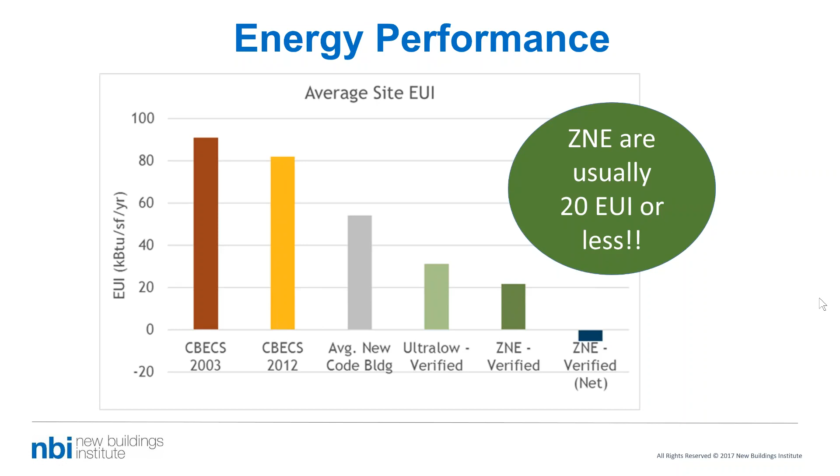We have verified and emerging buildings throughout the climate zones in North America. For those of you on the phone, one interesting feature is the ability to pull buildings in your region from the NBI database, look for comparables, use them as examples with clients, and demonstrate the practices of other buildings in your area.

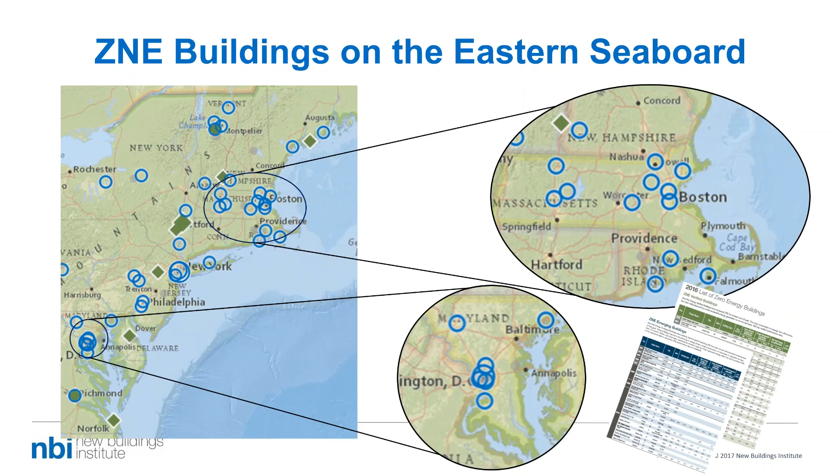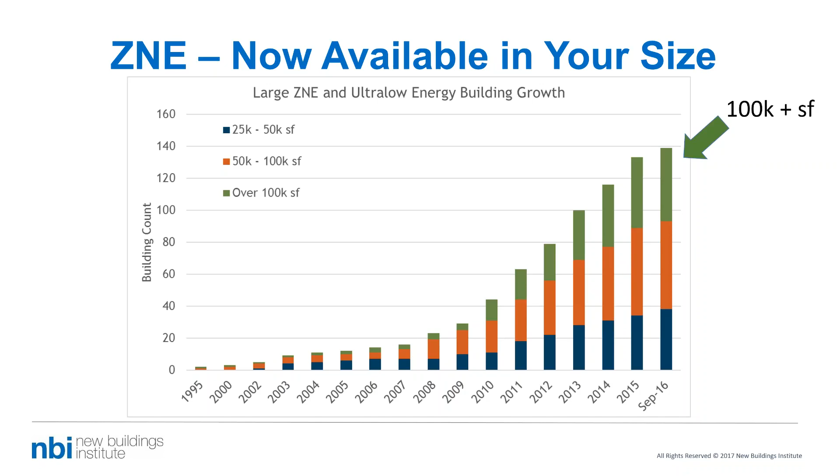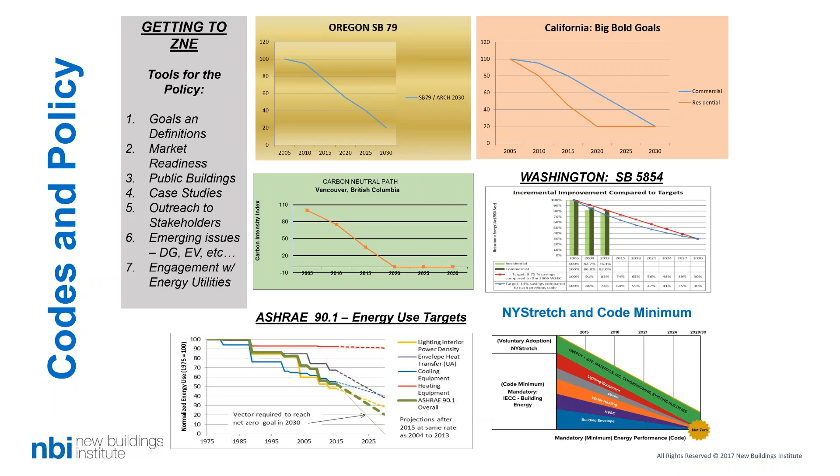Again, we want you to share your projects with us. It's a very simple online form—let us know about something. If you go in and see the report and a building you know about isn't listed, let us know, please.

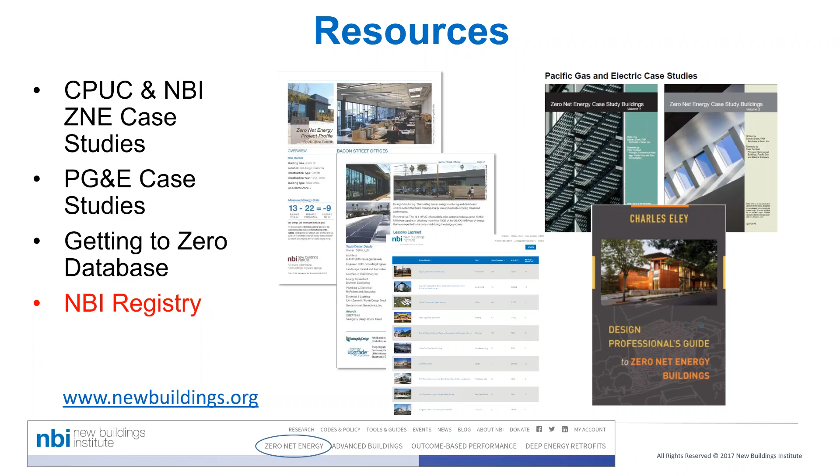You can get information on state specifics, particularly in California—we're tracking the state of California activity. We offer workshops throughout the country for early adopters, especially to public entities, municipalities, and school districts. This is definitely the go-to e-document you can sign up for if you're interested in seeing what's going on; we track this and put it out quarterly.

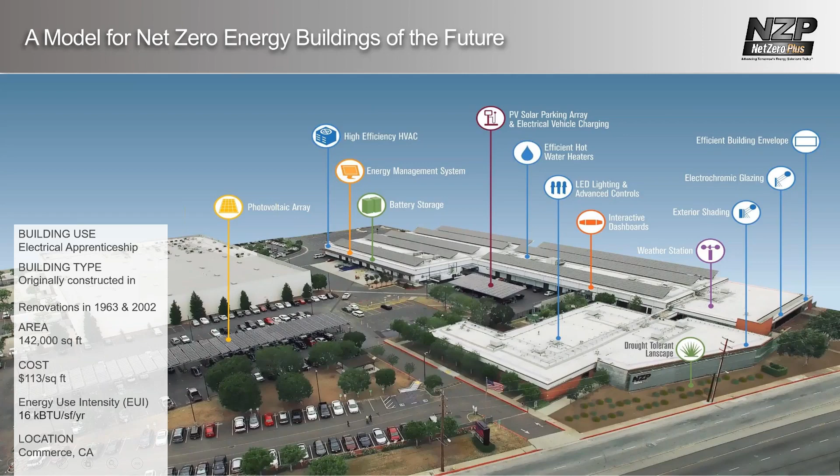Before we started the project, we did a very intense energy and building audit. We used Stok, a company located in Northern California, as a consultant on the project. Part of this was we went through the entire building envelope. The bottom part of this slide, you can see on the right side my shade structure, and on the left side, a large group of windows where we've installed electrochromic glass for shading on this long hallway of the school. When the sun hits it, it's got sensors on the outside of the building, and it will automatically shade and drop the temperature on the inside.

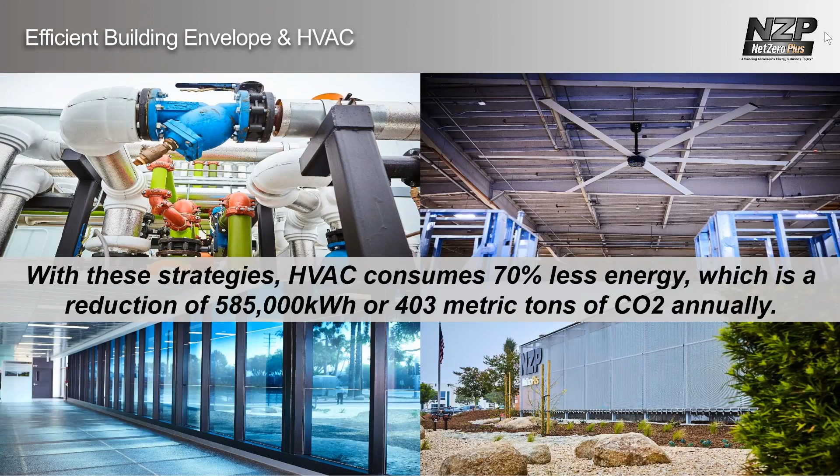For the space, we've used fans, exhaust fans, to help make the temperature comfortable.

Our next slide, we'll talk about our plug load and the hot water. We've reduced the energy used for hot water by about 93%. We've extensively looked at our plug load. Interestingly, by using solid lighting control and HVAC control, our new problem load, if you will, is in fact my plug load. My plug load is the biggest load on site. We're looking in the classrooms at deploying LED projectors and micro computers to help drop that plug load as well.

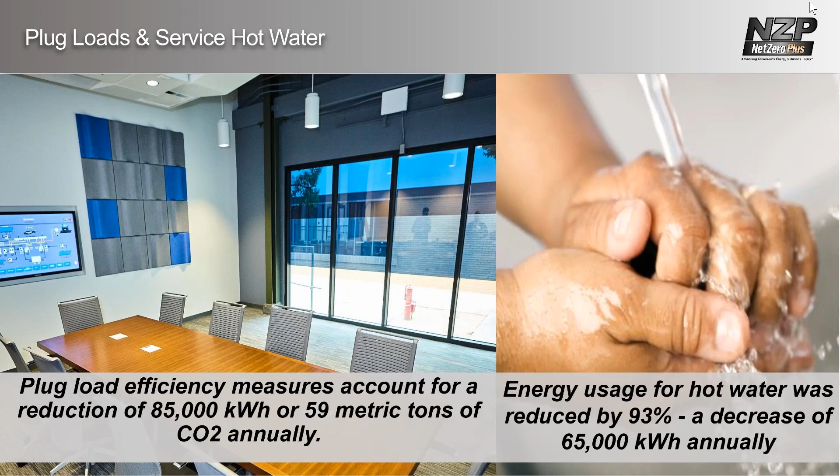Through the use of new LED lights and advanced lighting controls, we dropped that lighting load. That lighting load is now lower than my plug load. With LED lights, we found that brand new LEDs can be tuned down, so we've tuned all of the new lights inside of the building down to 80%. So when we've got 100% lighting going on, it's in fact only 80% of those LED lights, and we can continue to tune those down as needed.

For a number of reasons, because we're a school and certainly in the public eye, we have extensive use of dashboards. What you're looking at are 4 of the 9 dashboards that are here on site. These are touch sensitive, soon to be available on the school's website. What they do is allow interaction between my students, my instructors, people touring, people from the industry, architects, engineers, contractors, public officials, to really get a feel for what the building is doing, what the systems are doing today, and what they've done historically over a time period.

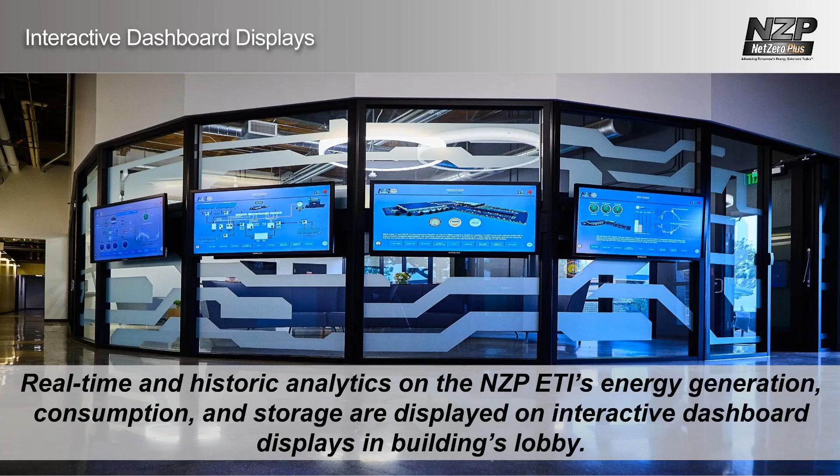We are overproducing, and that's where we get the name Net Zero Plus. That plus, the overproduction, is stored in the form of utility grade lithium-ion battery. In the event of an outage that takes us overnight, we can discharge those batteries and use this as an emergency operations center, as well as during the daytime island the building, disconnecting from the grid to continue to operate.

What we're in now is a graphical layout of our microgrid. Again, it shows the components that are integral to my microgrid.

I will add that we've got the ability with the microgrid to participate in the utility's automatic demand response. We've got the ability to also use the stored energy or the system itself to do peak shaving at times as well. We also have electric vehicle chargers.

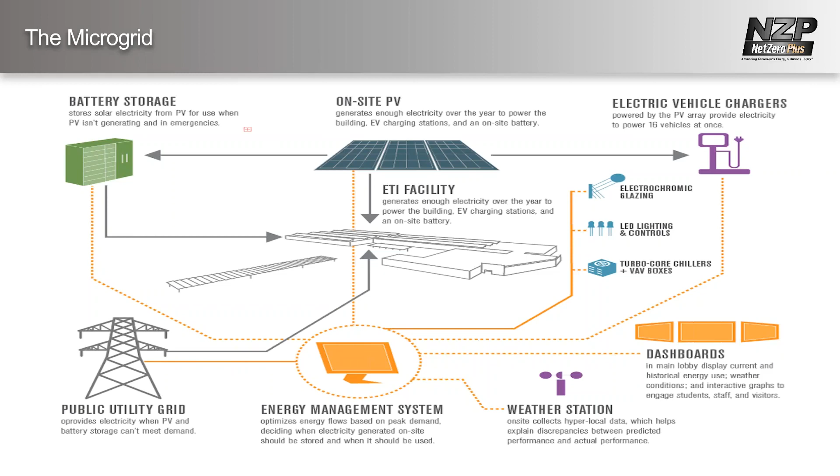Again, for more information, we were featured in a PBS documentary. The title of that documentary is Building Below Zero. It's still available for streaming to view on the PBS website.

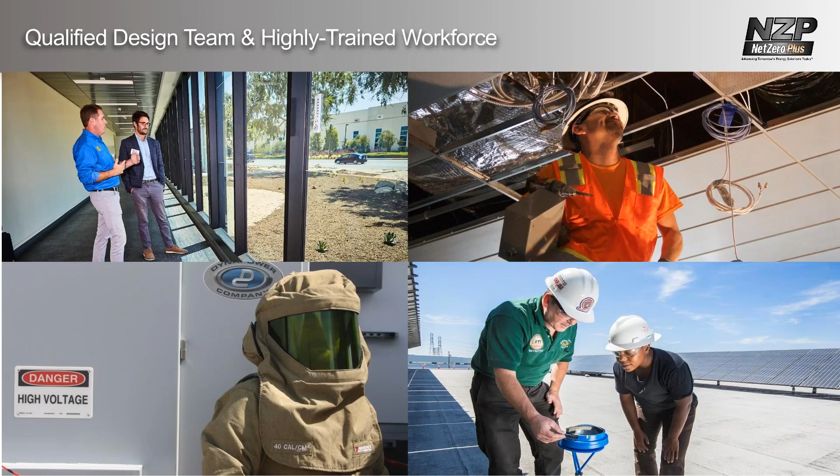It's critical when you start a project like this that you make sure that you team yourself with a highly qualified and trained workforce.

We are affiliated with the Electrical Training Alliance, the IBEW, that's the Electrical Workers Union, and the National Electrical Contractors Association.

Unfortunately, for our friends north of the border, we don't show anything in Canada, but we cover both the United States and Canada. There is training that is being completed now that will make sure that electrical workers and contractors in the U.S. and Canada are trained to do these projects.

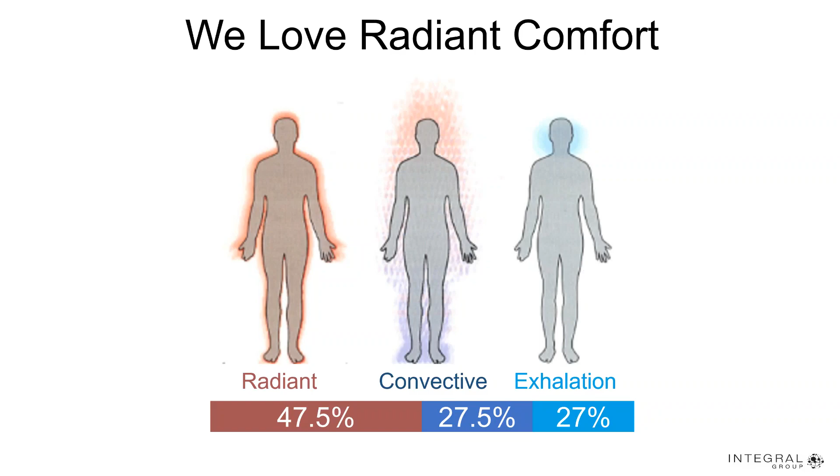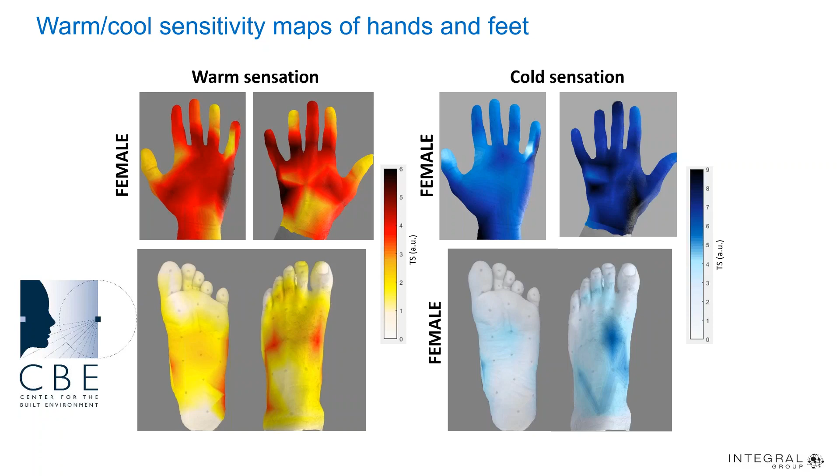The Center for the Built Environment at Berkeley is a group doing a lot of research, currently digging into radiant cooling and heating comfort systems in a 3-year study, mapping the body to understand where on different parts of our body we feel comfort sensations. Work we've done has found that radiant HVAC systems are often very comfortable, very low energy, and could be much smaller than conventional systems.

In one paper from Denmark, researchers found that radiant systems are able to keep people comfortable even when running at 50% of their designed capacity. This means buildings could operate at lower peak demands and even ride through peak heat waves without critically impacting comfort, allowing them to be very low energy and have very low demand.

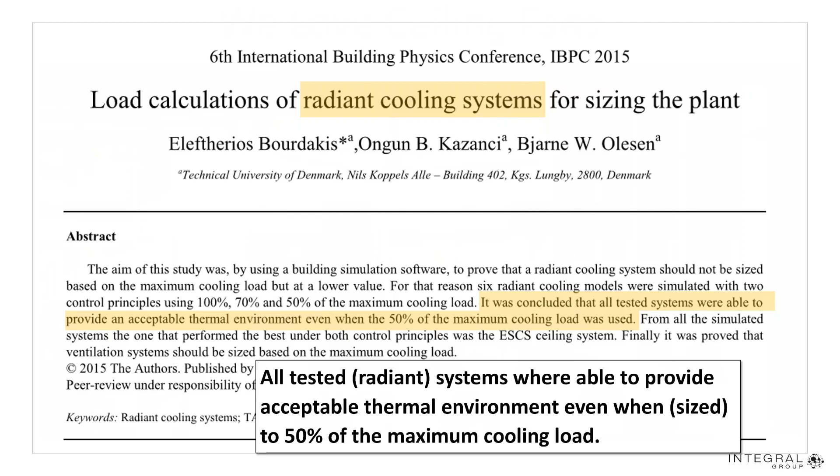A second key strategy I want to share today is designing with ceiling fans. We love ceiling fans - not just the small ones people bring to their desks from Target, but elegant ceiling fans. Architects and engineers need to design intentionally with these fans as key systems that provide comfort in classrooms and office buildings.

Much like radiant systems, there's very little research on the true effectiveness of one fan versus another. Right now there's a research project at Berkeley developing test procedures and design guides to help designers understand which fans provide better comfort at different configurations. Even a small fan running at 2 to 30 watts can help mix air temperature and provide adaptive comfort at higher elevated temperatures. Initial research done 5-6 years ago by Gwelen Paliaga shows how you can design different comfort criteria using fans throughout a building.

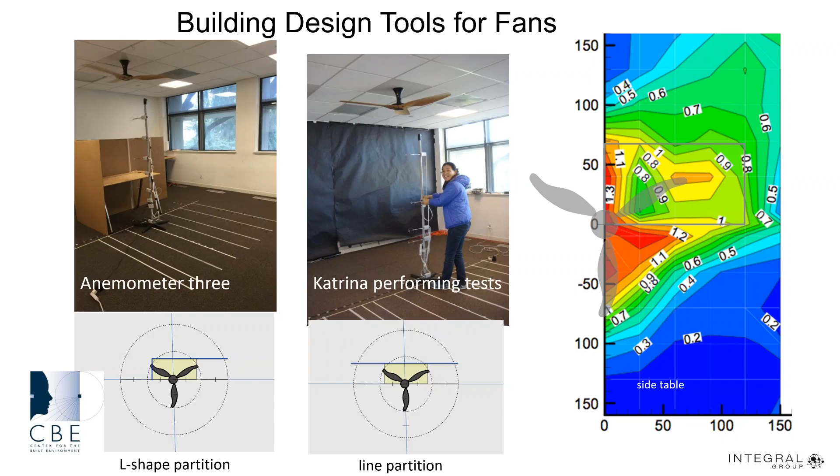When we combine these strategies, we start to see very low energy results. A radiant building with good air movement can almost multiply these benefits, improving both the capacity of the system - greatly increasing how much cooling or heating you get - while also mixing and providing fresh or recirculating air across people's bodies and balancing their comfort.

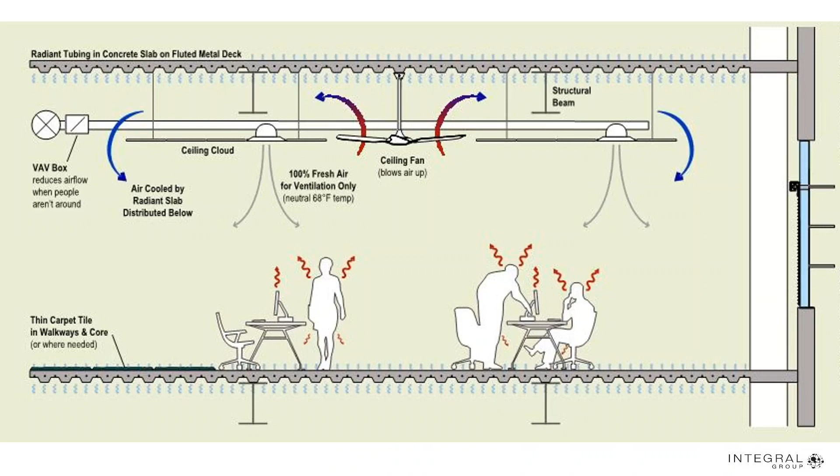For future-ready buildings, some research shows that even when we block a ceiling with acoustical panels to manage noise levels, adding a small fan in the right location can not only balance out the cooling that ceiling provides, but increase the cooling capacity even further - mixing air and providing the cooling needed to manage peak load while keeping systems simple and low energy to operate.

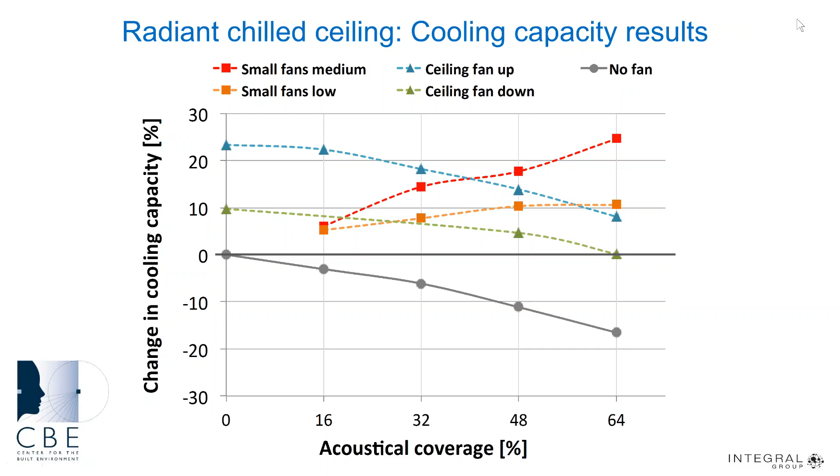So... for future ready buildings, let's see here. I'm going to pause for a second while I flip through my slides. Some ideas that I'll leave you all with here.

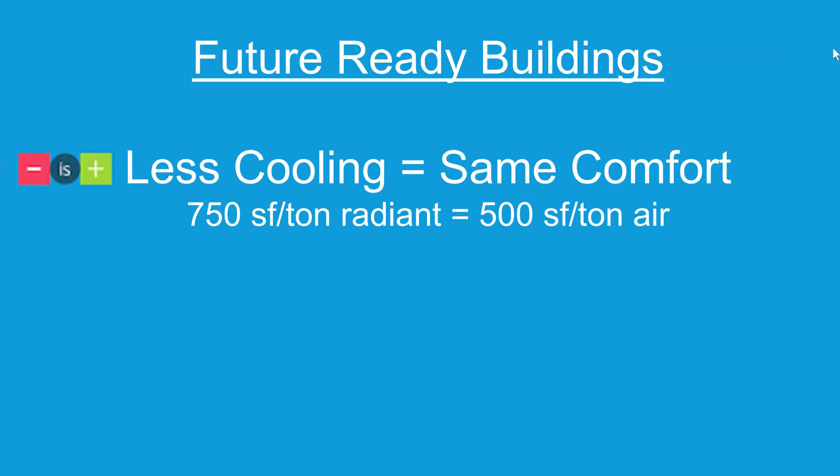For future ready buildings, remember: less cooling can mean the same comfort. Good design doesn't have to depend on how much cooling is installed in the building. Ceiling fans for all - how much can they really cost when you look at the great quality of space they provide in all applications? Both these strategies combined become best friends forever with systems like battery backups and simple solar systems in buildings that can ride through peak heat waves in critical times.

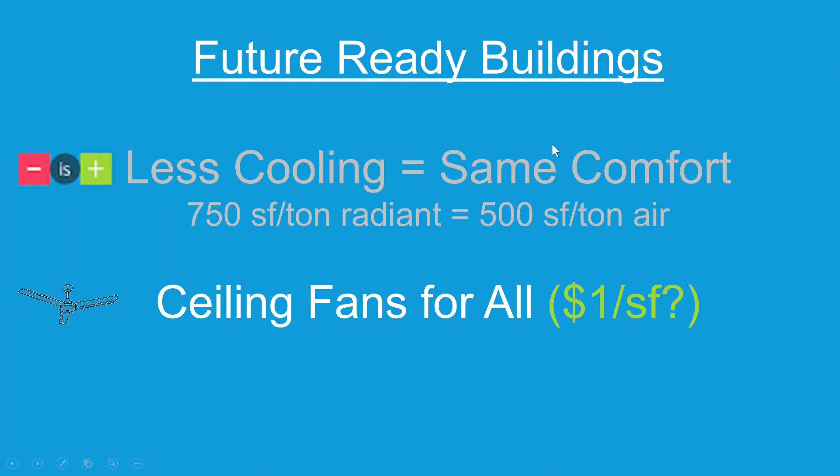Keep a lookout, question the right criteria for your buildings, and bring some of the leading research into your projects to share these great ideas that are only now starting to emerge from different universities around the world.

And thank you, Neil, that was fantastic. Yeah, great. I'm going to pause because we have 4 speakers, and see if Stacy has any questions that people have put in, just a couple for the first part of the webinar. Stacy, do you have anything you can share? Any questions our speakers can address? Yeah, can you hear me okay? Yes, excellent.

There are a couple questions, some around the definitions Kathy raised early in this presentation, so I'm taking you back a bit. There were questions about: if a building has 100% renewables, but it's all off-site renewable energy, how is that categorized? For the definition NBI is using, which is generally compatible across the country, off-site renewables are not counted towards zero net energy building status.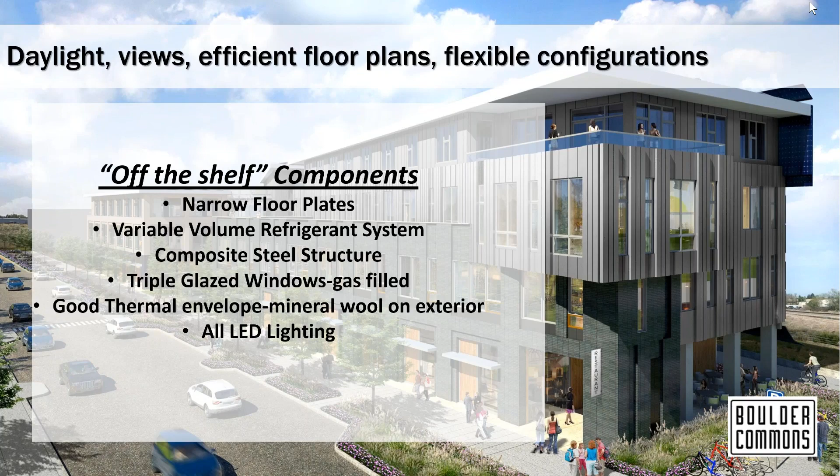So next slide. The spaces are designed in an interesting configuration because we wanted narrow floor plans, 65 feet wide on average, but we also wanted larger floor plans without too much area eaten up by the core, shown in gray here. We actually created a modified H-shaped form, and that H-shaped form has 10 sides, all of which have glazing on them, allowing for a wonderfully daylit floor without the core eating up too much of it.

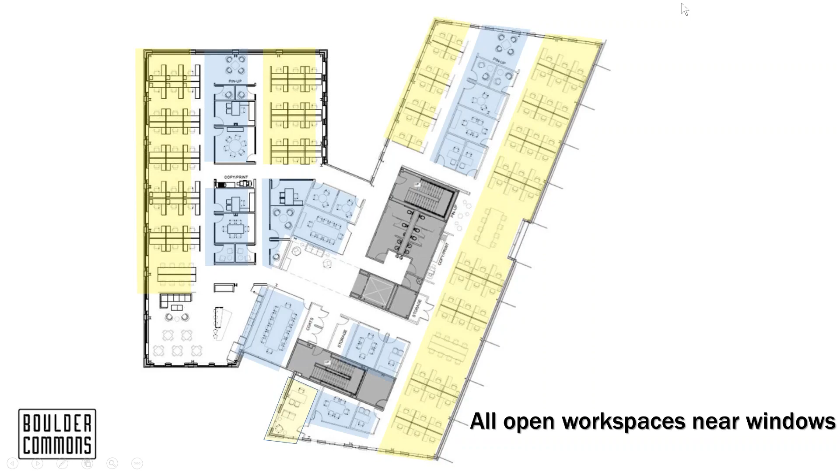Next slide. From a solar production standpoint, we're using the roof of the building, with the exception of a few portions of a roof deck, and then we're doing the whole southeast wall as a solar wall. As we modeled the project with Integral, we realized we were getting approximately 70% as much energy on that southeast wall as on the roof. So we decided to create a solar rain screen and essentially use solar panels as siding.

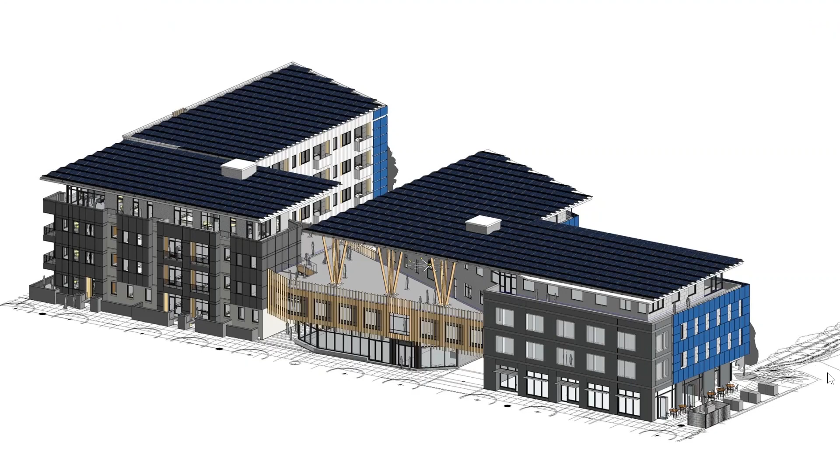I think the only way we've been able to do what we've done in a market rate building, competing with other buildings in town on price, was to bring in a pretty educated team from the very beginning. EHDD had lots of experience in net zero buildings, Integral has experience across the country, Coburn brought great local experience, and Huntsman Architectural Group, who helped with the interiors, has been involved in a number of highly sustainable interiors focused on employee comfort. Without that team, we would have been stumbling around trying to get to net zero. With the team we have, we're hopeful we'll be certified by NBI after our first full year of operations.

So thank you. Thank you, Andy.

Fantastic example of market rate, and also that interesting aspect of vertical use of photovoltaics. I'm going to introduce Kenner Kingston, President of Architectural Nexus. Kenner, you have control, and we'll see how that goes.

Great. Thank you. Can you hear me okay?

Excellent, fantastic. Well, the conversations today really do point toward this discussion about a part of sustainability, regenerative design, ZNE design that is harder to control than the building, the engineering, or the systems, and that is the people inside. Just a little bit more about me: I have the privilege of leading a group of diverse design professionals in an integrated practice that includes site design, interior design, graphic design, branding, as well as architectural design. We like to think of ourselves as a large firm with a small firm culture, and in that regard, we're very people-oriented, people-driven. That sets up the discussion about why an architect is so interested in talking about the people inside the building, not just about the building.

And so we found a partner. We're in the second stage of the evolution of our occupant engagement behavioral energy programs at this point. We've partnered with a technology group, Sustain3, that has developed a web-based platform that helps us drive change at the individual occupant level through gamification. Gamification is something I've been watching for more years than we've been a building owner, trying to figure out how you work this into running a business or providing services to folks interested in ZNE buildings. Well, we're now in our third year of the program, dubbed YouMatter at the University of Utah.

The program is the behavioral component of the university's Better Buildings Challenge effort, trying to help them support their long-term carbon reduction goals. All of the low-hanging, easy stuff they already know to do, all the engineering solutions, all the architecture solutions, those are backed up into a big pile called deferred maintenance that's measured in millions and millions of dollars. So being able to approach them with solutions to driving down energy usage without having to tap capital budgets is kind of a key issue.

We've had tremendous success with huge rates of engagement in the College of Science, and a 25% plug load reduction result in the art and architecture program. Next slide, please.

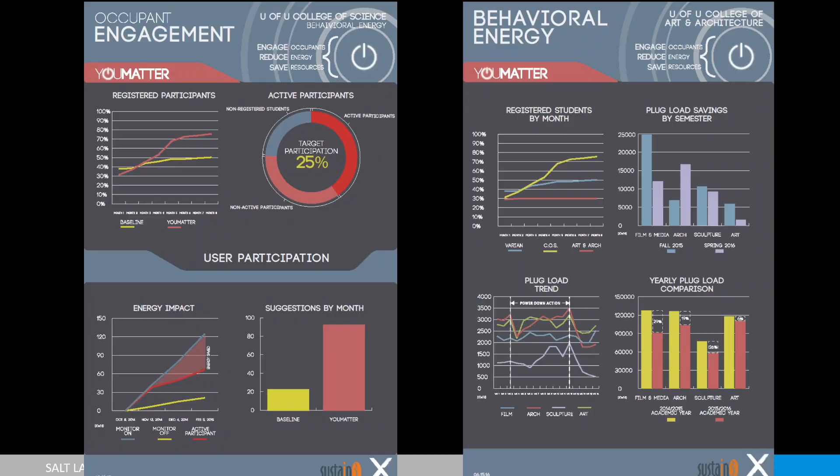So how do we do it? Process is the key here. The Sustain3 platform works by understanding that individual occupants have a limited bandwidth. Their time is precious, and they're all motivated by very different things. For some folks it's going to be peer pressure. For some it's rewards. For others, competition. For others, information and learning. And so you have to figure out how you can access that.

And I think this platform has done that. What is common to all of the motivations that get people to change their behavior in a building is that the change doesn't occur unless someone does something. So the key to the platform is that there's a call to action in the program on a weekly basis that tries to move passive occupants into active inhabitants by getting them to do something different. And what happens is if you get enough people doing something different in a common platform, you start to see a culture emerge. It's extremely successful in places where a culture already exists, such as in our office.

We employ the program here in our office because we've taken this LEED Double Platinum goal we had in Salt Lake City and leveraged it in our Sacramento office to work on a Living Building Challenge building that we just opened at the end of last year. And we feel like doing is the key. Next slide, please.

And so as you can see from the pictures, it's a web-based platform that is accessible on any device, anywhere, anytime, that allows users who are very busy to get an opportunity to connect to the information they're looking for, to learn and advance a culture of sustainability inside their organization.